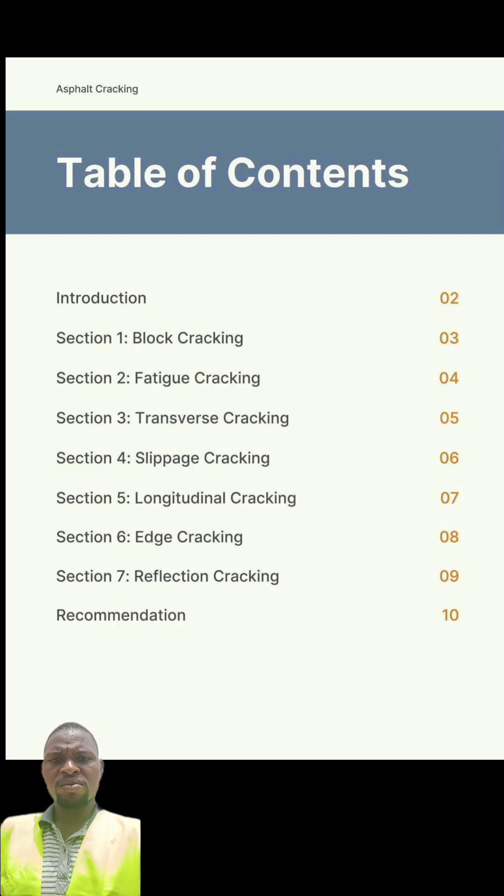For our table of contents, we have the introduction, where we'll talk a little bit about cracks. Then we'll talk about block cracking, fatigue cracking, transverse cracking, slippage cracking, longitudinal cracking, edge cracking, then reflection cracking. So we are going to talk about all these types of cracking, their causes, and the treatment for each of them.

For our introduction, we are asking: why do asphalt pavements crack? What is the reason? Asphalt roads can develop cracks for various reasons. Extreme weather, like very hot or cold temperatures, can make the asphalt expand and contract, causing cracks. When water penetrates the asphalt, it weakens it and makes it more likely to crack.

If the road was built with poor drainage, there's not enough support underneath. So poor compaction, less support underneath the road, or low quality asphalt. When you make use of low quality material for your road surfacing, it is more likely to crack, because many cracks occur from poor material usage.

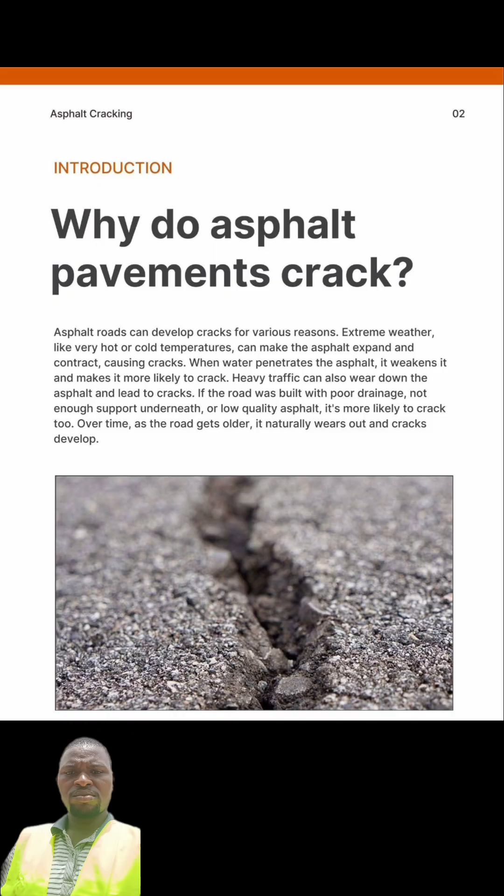Over time, as the road gets older, it naturally wears out and cracks develop. When you've used a particular road over a long period of time, it can result in cracking because of heavy usage. So when you are using your road, you tend to do maintenance alongside, so that as the cracks come up, the maintenance takes care of them and puts the road back in shape.

The first type of cracking is block cracking. What is block cracking? Block cracking is a series of rectangular cracks that are interconnected. This is common because you see it on roads often. These cracks usually cover a big area of the road or pavement. So we'll dive into the causes.

The cracks may show up because of joints under the concrete pavement, either one joint or more. The problem could also stem from the layer underneath the road, like cement or macadam, that has shrunk or gotten weak. If the cement structure underneath the road surface is weak, it can result in block cracking.

Then inadequate slab thickness. When you are casting your rigid pavement, the slab thickness should be as prescribed by your engineer. It shouldn't be lower than the required thickness, because inadequate slab thickness can result in block cracking.

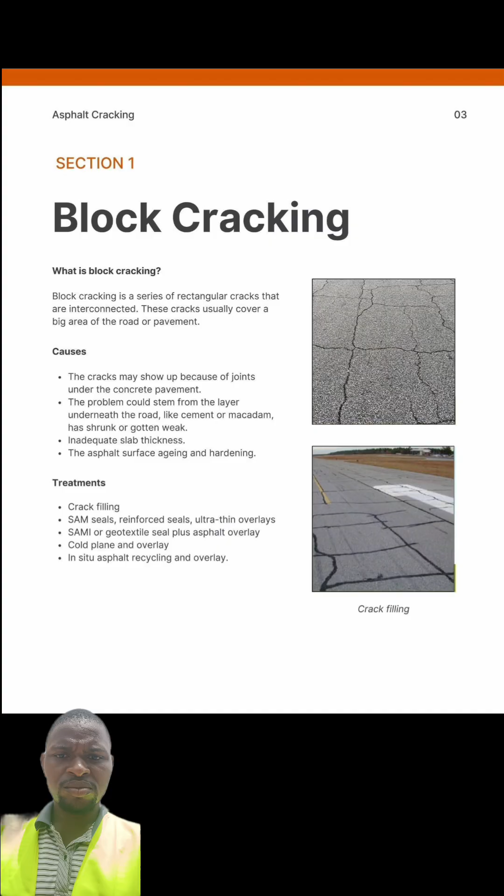The second type of cracking that we have is fatigue cracking.

What is fatigue cracking? Fatigue or crocodile or alligator cracking is a pattern of interconnected or interlaced cracks that create small polygons resembling a crocodile skin. It's often formed in the wheel path and may show a noticeable longitudinal grain. So if you look at a crocodile or fatigue cracking, you don't even need to be told because of the pattern that comes with this type of cracking.

So the causes of this crocodile cracking or fatigue cracking: fatigue-induced structural cracking often associated with high pavement curvature values. Then inadequate pavement thickness, inadequate provision for pavement thickness. Then we have moisture. So when you have too much moisture on your road surface, it can actually lead to this fatigue cracking.

Then we have poor quality material. You have to use the best material for your road surfacing, such as brittle or aged bitumen or low-strength aggregate. So your bitumen should be of the high standard, then your aggregate too should be of the high standard. You shouldn't use dead rock for your aggregates. Then inadequate compaction during the construction of asphalt or cementitious layer. When you have inadequate compaction, it actually tends to lead to this type of fatigue cracking.

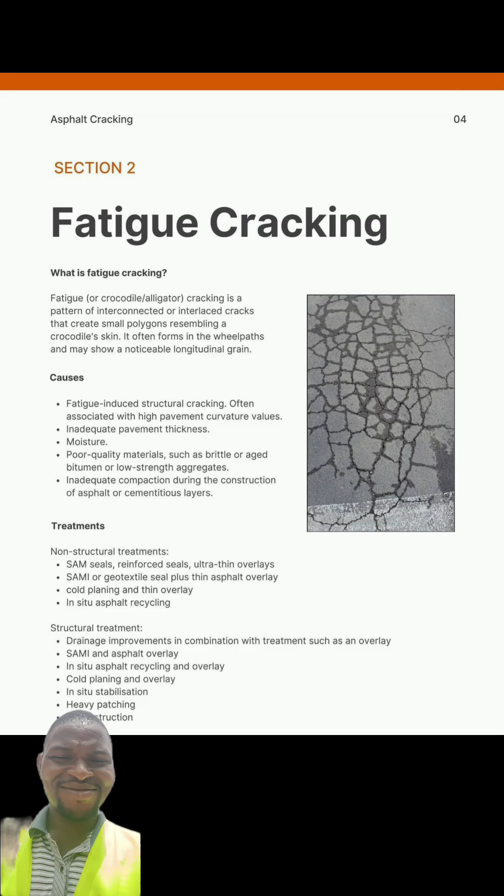And for the structural treatment, we have drainage improvements in combination with treatments such as the overlay. So you are going to make provision for your drainages on both sides. Then we have SAMI and asphalt overlay, in situ asphalt recycling and overlay. We have cold planing and overlay, then in situ stabilization. You stabilize the soil by mixing it with cement so that you harden the soil, right? Then we have heavy patching and reconstruction. So you can actually overhaul the whole process and do a reconstruction.

Yeah, the third one is transverse cracking. So what is transverse cracking? An unconnected crack that runs perpendicular to the direction of traffic. You can look at the picture, you can see the way it looks. The causes of this transverse cracking: we have reflection of shrinkage cracks or joints from a cemented base. So when you have a cemented part of the road, and you have that crack in between the surfacing and the cemented part. Then we have joint or crack formed during asphalt surfacing, often due to low temperature or hardening bitumen.

Then we have failure in the concrete base structure. Then shrinkage of the concrete slab as it cures because the joints were cut too late or the slab is too long. Then we have ground sinking due to underground utilities or structures like bridges or culverts. Then tree roots growing into the layer beneath the pavement. Yes, because sometimes when you have tree roots growing into the road pavement, it tends to give this type of transverse cracking.

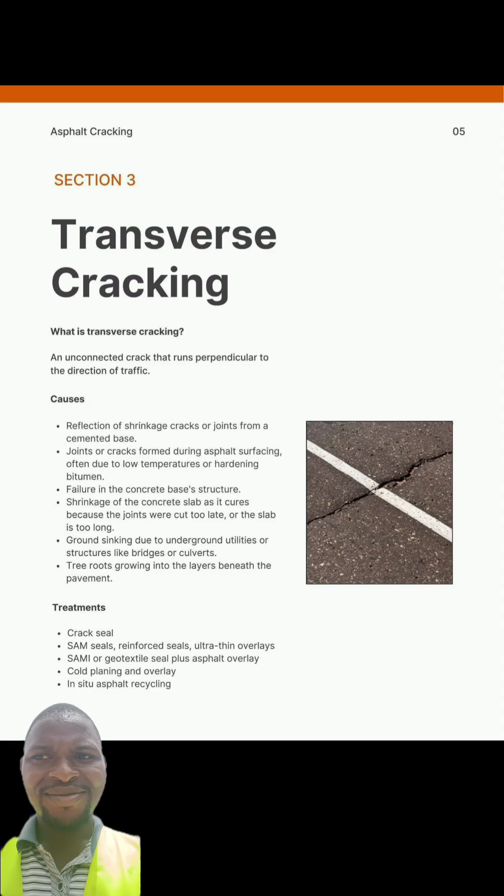Yeah, the next one is slippage cracking. So what do you understand by slippage cracking? These are crescent shaped or half moon cracks that often appear closely spaced, running parallel to each other, and are frequently linked with shoving. This type of cracking is commonly found in asphalt surfacing. So sometimes on the road you see this type of cracks in your asphalt surfacing.

So the causes for this type of cracking: we have weak adhesion between the wearing course and the underlying layer. When you have your underlying layer and you have your wearing course on it, if there is no adhesion between your wearing course and the underlying layer, it tends to lead to slippage cracking. Then insufficient thickness of the wearing course.

Then we have asphalt getting pulled beneath the paver screed during placement, particularly in low temperature. Then we have elevated horizontal shear force resulting from turning and acceleration. Then unsuitable asphalt mix for specific traffic conditions. Now, this is very, very important. Your asphalt mix should be according to standard. Then a base layer with low modulus, right?

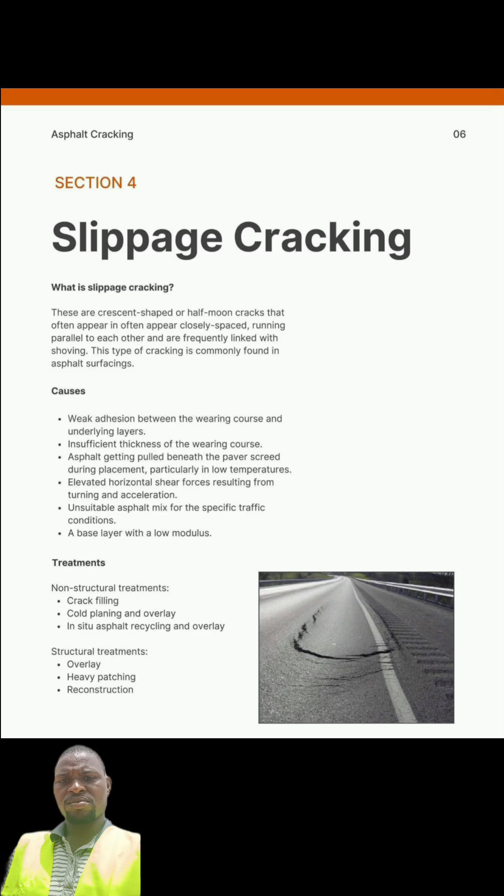Yeah, the next one is longitudinal cracking. So what is longitudinal cracking? These are cracks that run lengthwise along a pavement. They can appear individually or as a set of parallel or staggered cracks. Occasionally there may be some limited branching. So you're going to have a crack, then limited branching along the cracks. Longitudinal cracking often marks the initial crack formation within a wheel path or not.

So for the causes of longitudinal cracking, we have two different causes, either when they occur individually or when they appear as a series of nearly parallel cracks. For the first one, it results from the mirroring of joints or shrinkage cracks in the solid base below, and can be caused by poorly executed joints in the top asphalt layer. During construction your joint needs to be taken care of in the right way. But if it is poorly executed, you are going to have these types of cracks at the joint.

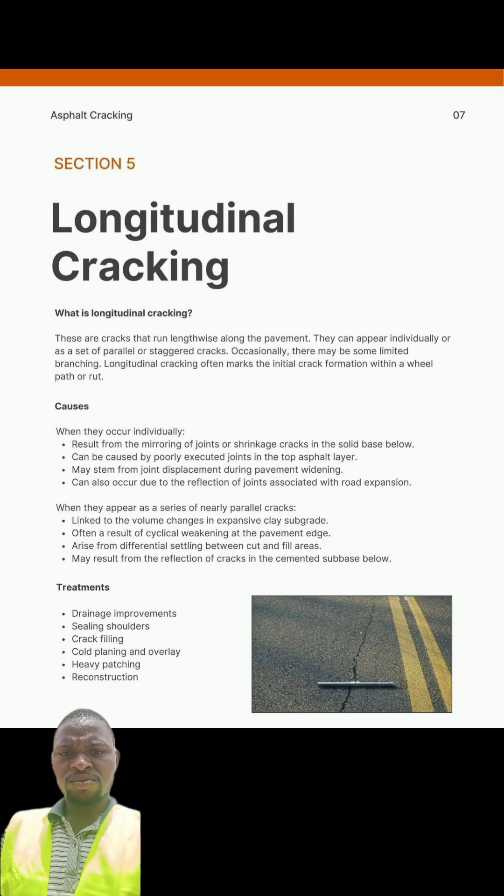So the treatment for longitudinal cracking can be drainage improvement. That means you provide drainage for the road. Then sealing shoulders, meaning you seal the shoulders of the road. Then crack filling, you can decide to fill all those cracks. Then cold planing and overlay, heavy patching and reconstruction.

Yeah, the next one we have is edge cracking. So what is edge cracking? This occurs along the unsupported border of an asphalt or sprayed seal surface, where the surface of an unsealed shoulder is lower than the level of the neighboring pavement surface. The area where the seal meets the shoulder is subjected to direct traffic, causing abrasion and shear failure of the pavement's edge,

often appearing as fretting. This issue can be isolated to certain spots or extend continuously along a road segment. It's particularly common on sharp curves or areas where the pavement edge is prone to tire wear and attrition. So where you have tire wear and some attrition, edge cracking can come into play.

So the causes of edge cracking: we have an improper road alignment or insufficient pavement width, leading to vehicles driving along the pavement edges. So when you have improper alignment, that means the alignment of the road is not adequate, or insufficient pavement width, that means your pavement width is not sufficient.

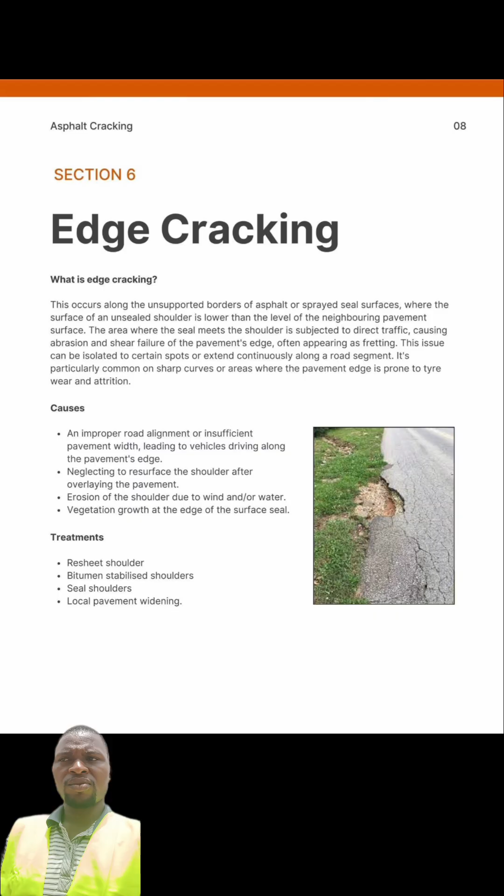Then local pavement widening. That means you can actually increase the width of your pavement by widening it. Then we have reflection cracking.

So what do we understand by reflection cracking? Reflection cracks occur when an overlay of asphalt pavement is placed over an existing cracked or jointed pavement structure. That means when you have asphalt pavement being placed on an existing cracked or jointed pavement structure.

So they can also arise in situations where asphalt overlays are applied onto existing asphalt roads without adequately addressing cracks in the original pavement. So that means placing your asphaltic pavement on existing roads with cracks. So you didn't actually address the cracks on the existing roads.

So the cause of this reflection cracking is differential movement across the underlying crack or joint, particularly in the case of joint reflection cracking. Joint reflection cracking occurs when the PCC, that is the Portland cement concrete, slab beneath the HMA, that is the hot mix asphalt surface, moves due to thermal or moisture changes. So when there's that movement, it tends to cause reflection cracking.

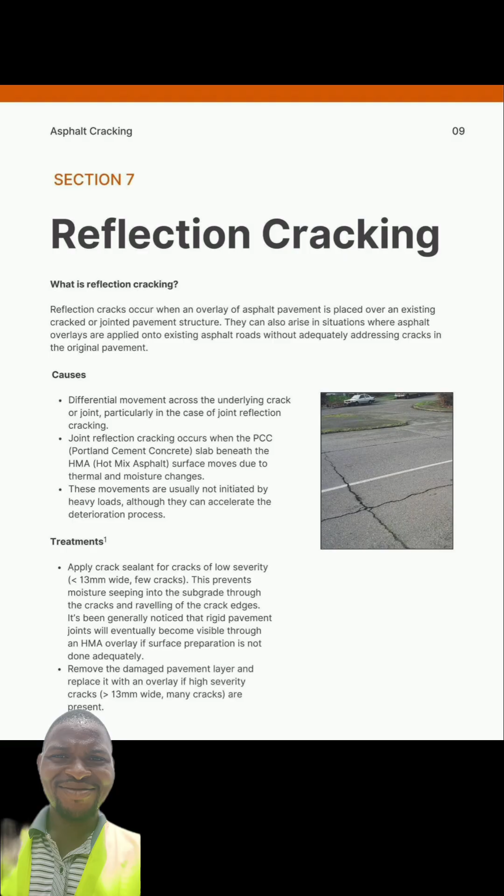So our recommendation, where to go from here. Prior to conducting any repairs, the first step is to conduct a visual survey of the cracking. Visual surveys are common ways of collecting cracking data. The thoroughness and precision of a visual inspection may differ greatly from one project to another, depending on how crucial the data is for identifying the source of the problem and choosing the right solution.

So there are automated methods of cracking data collection, like the Automated Road Analyzer, ARAN, then LCMS. The LCMS unit can spot a broad range of issues simultaneously. The ability to collect more extensive data brings significant cost advantage in crack detection and pavement monitoring.

So ARAN LCMS is our first 3D laser road profiling automated road analyzer capable of undertaking automated measurements of the road, surfacing condition and geometry. So this analyzer helps to capture the geometry of the road automatically.